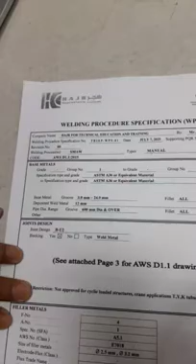Good day. So today we're going to discuss WPS, which is Welding Procedure Specification. So what is Welding Procedure Specification, or WPS? It is the formal written document describing welding procedures which provides direction to the welder or operators for making sound and quality production welds as per the code's requirements.

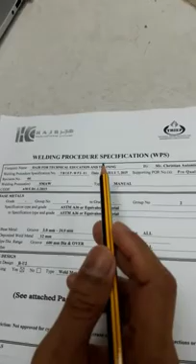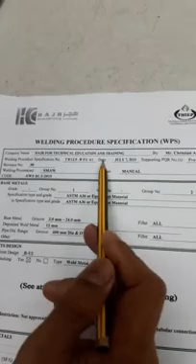Okay, so first we have the basic information. It includes the company name, who made this WPS, the welding procedure specification number, the date, and then the supporting PQR. So for this WPS, we use pre-qualified. Pre-qualified means that it's already proven. The materials that we use, the joint design, the electrodes, have been proven for so many years.

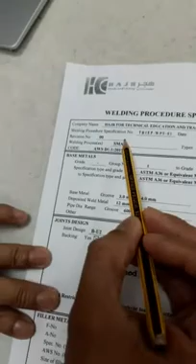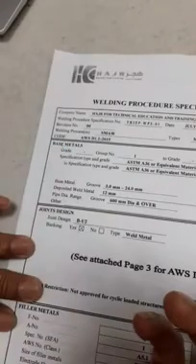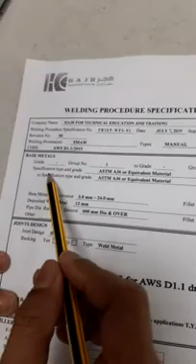Okay, so the revision number, the welding process that we use for this WPS: we use SMAW or shielded metal arc welding. Type, manual. Okay, next is the base metal details. So for this one, we see the grade, group number. For this one, he used up to group number 2. Specification type and grade, he used ASTM A36 or equivalent material.

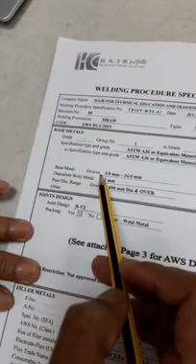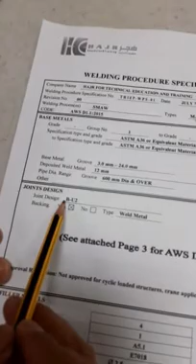The base metal range 3.0 mm up to 24.0 mm. Deposited weld metal 12 mm. Pipe diameter range 600 mm diameter and over. Fillet, all. Next is the joint design or joint details. So the joint design that he used is butt weld. U means unlimited. 2 is for single V.

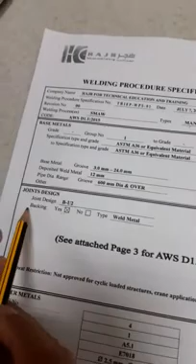Okay, so B-U2. Backing, yes, we use backing. What type of backing? Weld metal. Okay, so the joint design drawing is on page 3. Later on, we will discuss that after we go to that page.

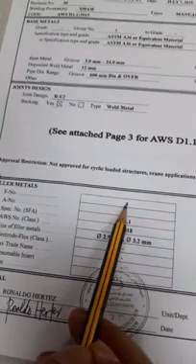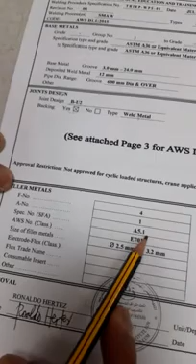Next is the filler metal details. Okay, so the F number for this one, they use 4. The low hydrogen electrodes belong to this group. A number 1, spec number A5.1, which is the specification for carbon steel electrodes for shielded metal arc welding. AWS number or class E7018. Size of filler metals 2.5 mm diameter and then 3.2 mm diameter. Electrode flux, trade name, consumable insert also belong to the filler metal details.

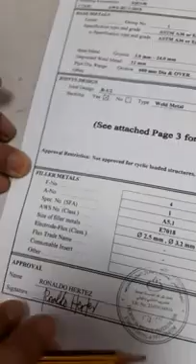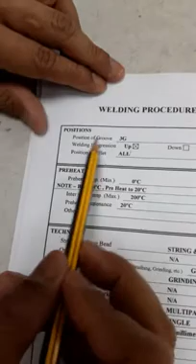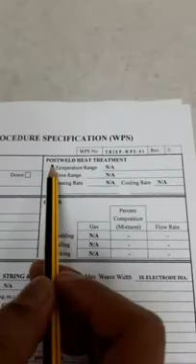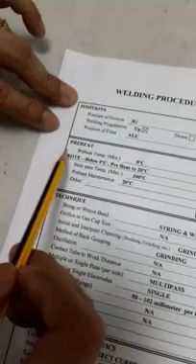Okay, next we go to the second page of this WPS. We have the positions. So the position of groove is 3G, and welding progression is up. It means we do welding vertical up. Position of fillet, all. So post-weld heat treatment includes temperature range, time range, heating rate. Then the preheat includes the preheat temperature, interpass temperature, preheat maintenance. And the gases also belong here: shielding, trailing, and backing. But for this WPS, we don't need that because we use SMAW.

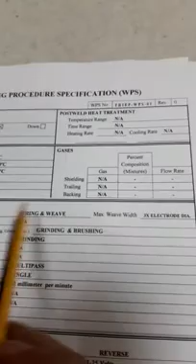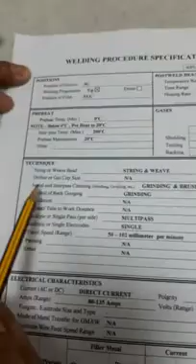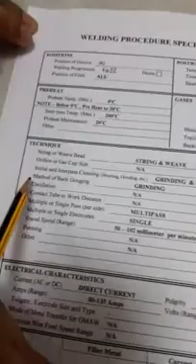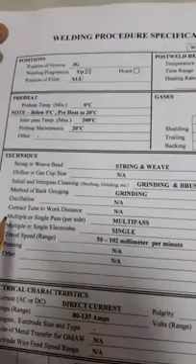Next is the technique. Stringer or weave bead, yes, we use both of them. The maximum width of the weave is 3 times the electrode diameter. Initial and interpass cleaning, we use grinding and brushing. So every time we do welding, you need to grind and brush to make it clean. Method of back gouging, grinding. Oscillation none. Contact tube to work distance none. Multiple or single pass, we use multiple. Multiple or single electrodes, single. It also includes the travel speed, peening, none, other.

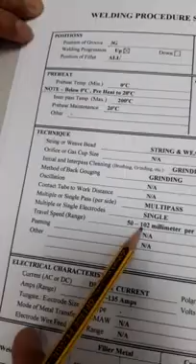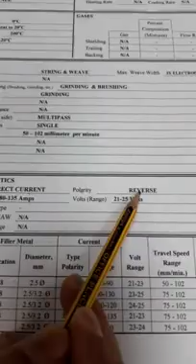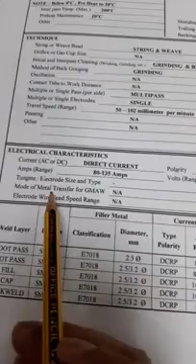Okay, so next is the electrical characteristics. Current type AC or DC, we use DC or direct current. The polarity is reverse polarity. It also includes the amp range. The volts, tungsten electrode size, which is for GTAW, mode of metal transfer, which is for GMAW. Electrode wire feed speed range, for GMAW and FCAW.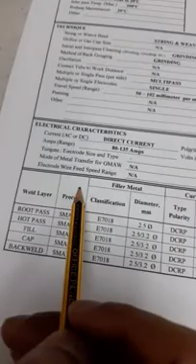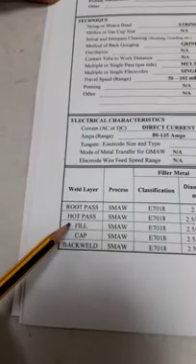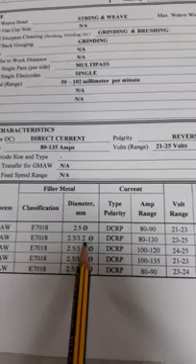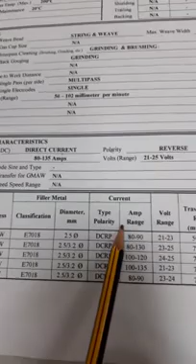Okay, next is the welding parameters. It includes the weld layer, from root pass, hot pass, fill pass, capping, up to back weld. The process that we use for all of them is SMAW. Classification of filler metal, 7018, we use 7018 with diameter from 2.5 up to 3.2 mm. The current and polarity, DCRP, which is direct current reverse polarity. It also has the amperage range, volt range, and the travel speed.

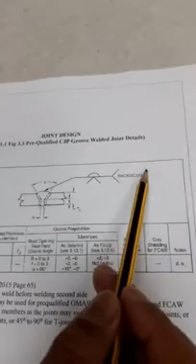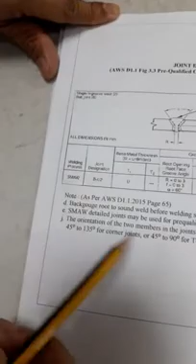Then lastly we go to the third page of this WPS for the joint design. So this is the drawing of the joint design. As you can see, the welding symbol has a back gouge. It means that we need to gouge it using the grinder and then do welding on it. As you can see here, the process, the joint design, and the details for the root opening, root face, and groove angle are here on the third page.